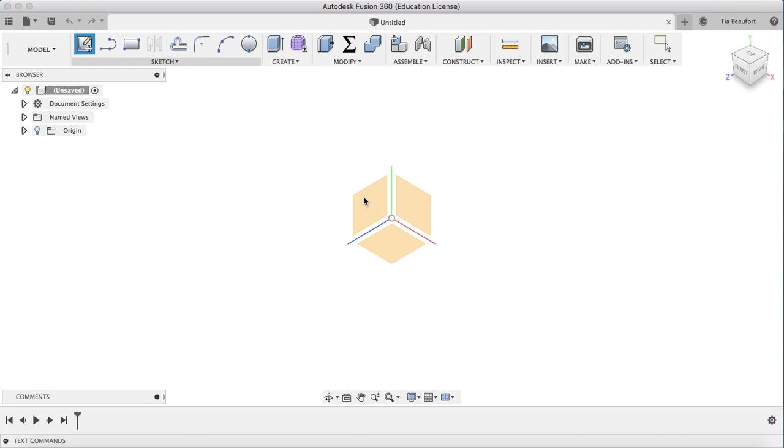So I'm going to start off by creating a sketch. When I see this view here, I want to draw on the ground, so this is the bottom, the top layer here. But I want to draw on the ground, and I'm just going to draw some squares for the legs on the ground, so I'm going to click on this layer.

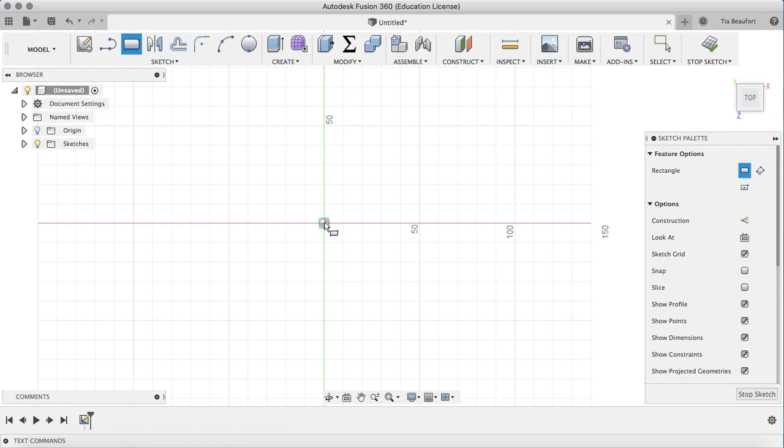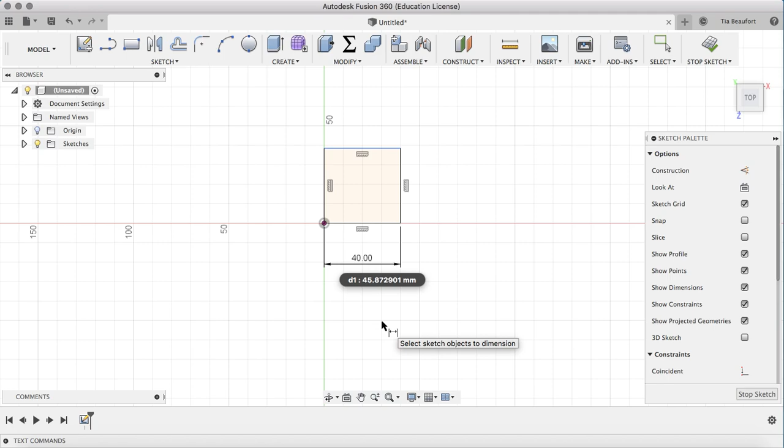Then I'm going to click 2-point rectangle, and from the center point I'll click once, drag out, and click again. I'll hit D on my keyboard and highlight this line, click once, drag it out, click again, and type in 40. I'll do the same for this line, click once, drag out, click again, 40, enter.

Now you'll notice all the lines have gone black. They were blue before and now they've gone black. That's because we put these dimensions in and it's locked everything into place. That's what I want, I want my lines to be black. I'm going to push the escape key.

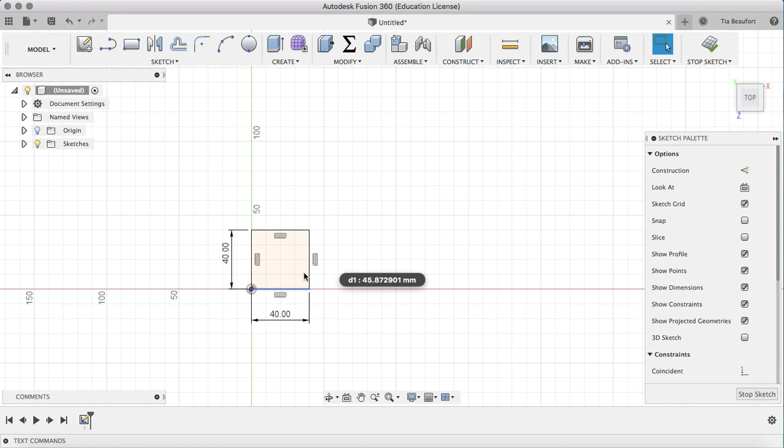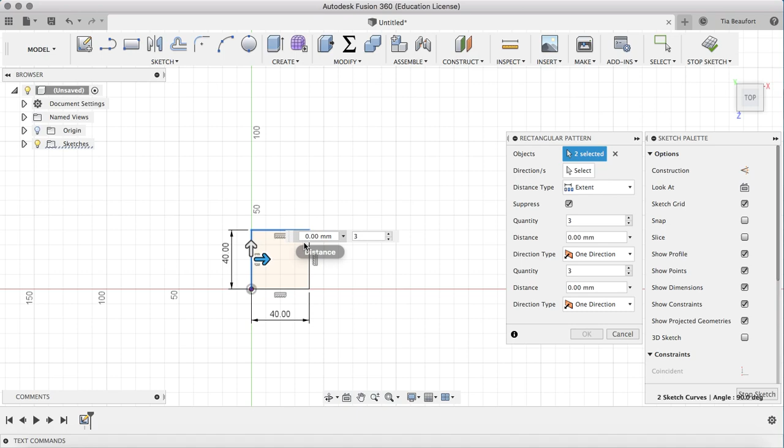Instead of drawing another 3 squares, I can do what's called a rectangle pattern. I'll click on these lines and repeat the pattern. So I'll go sketch, rectangular pattern, click on that, and click on these 4 lines here, and these little arrows come up. You'll see when I drag one out like this, there's 3 coming out. So I'll click 2, because I only want 2 like that.

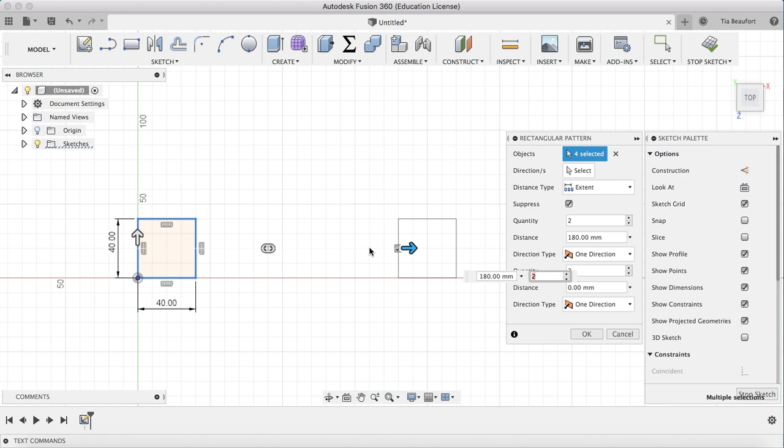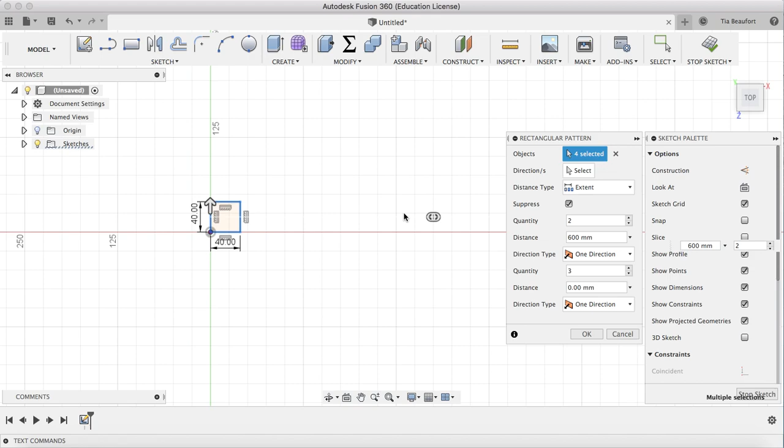I'm going to drag it out, and I can put in a measurement for the distance away from each other. So if I'm doing a table that's 600 long, I can make the distance between these 2 legs 600. If I zoom out, you'll see how far apart they are. Or I might make it 400, let's just go 400 for now.

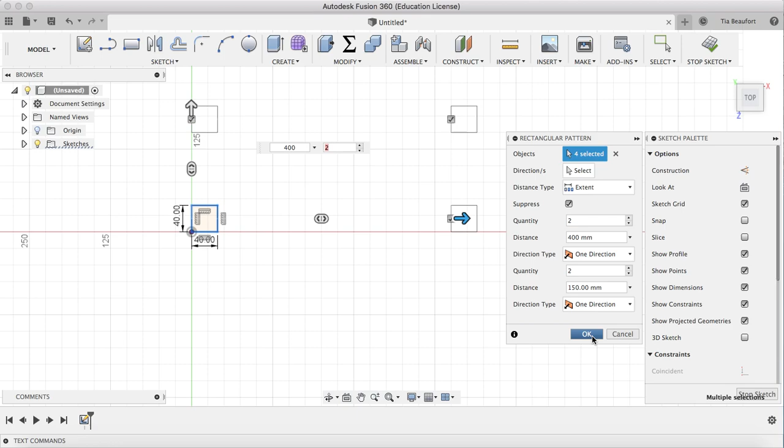I can drag this arrow up and it'll do the same thing but the other way. I'll go 2, and looking at that distance, that's quite a good distance for a basic coffee table. So let's go 150 away, and this distance down here, just click on the arrow, 400 away. If I just go OK, it will automatically draw all those squares for me, and I don't have to redraw any more squares. So now I'm happy with them.

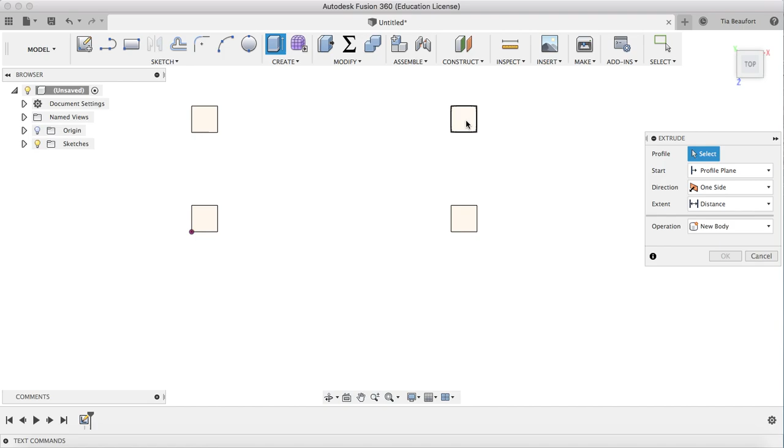I want to now make them 3D. So I'm going to click on my extrude button, or click E on my keyboard, and all I have to do is click each square and type in my distance, how far up it's going to come. So if I click, let's say 400, it will add the distance. Now I can't see at the moment because I'm still in the 2D view.

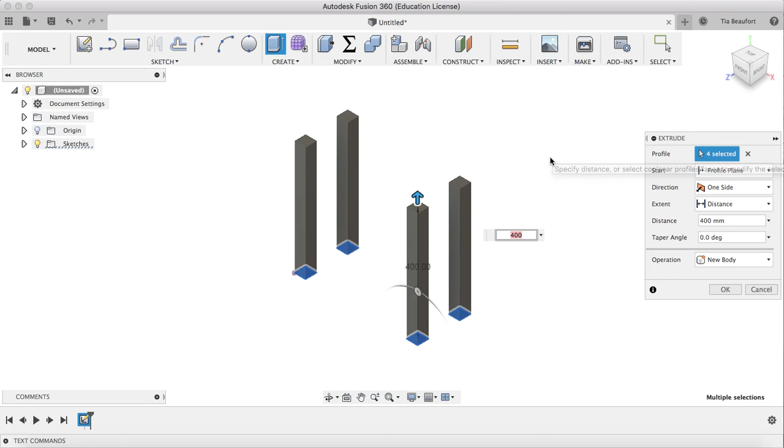If I click on my home button and zoom out, you can see that 400 is very high. So I can drag this arrow down and get a feel for what actually looks better. I'll pan around and might bring it down to 200, it'll be quite a low table. So I'm going to leave it there.

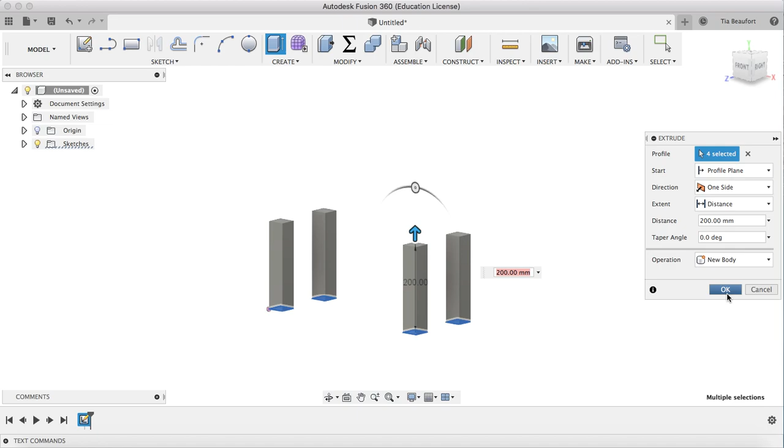I'm going to click, make sure my operation says new body, and click OK. Now I've got 4 legs. Cool.

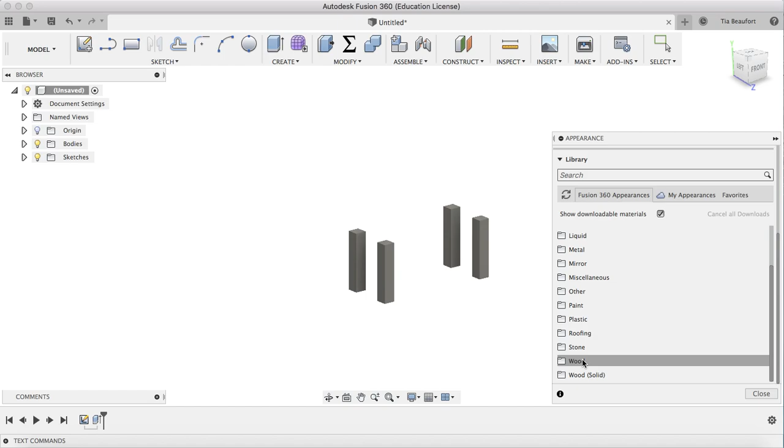At this point I can click A on my keyboard, and this brings up appearance settings. If I scroll down, I've got a range of different materials I can work with. If I scroll down again, let's click on wood, and I'll scroll down and see bamboo light. I'm just going to drag that onto each one, and it quickly gives me a little visual of what those parts will actually look like.

Okay, cool, so this is just part 1, that's how to do the legs. In the next part, I'll show you how to do the rails. Cheers.